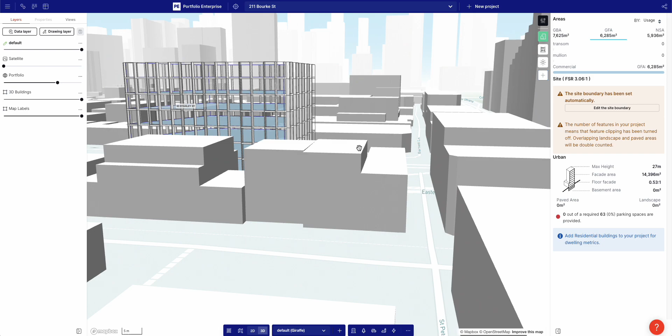Hey guys, in this video I am going to show you how to build this kind of articulated facade using a new block in our flow builder called Line Shorten.

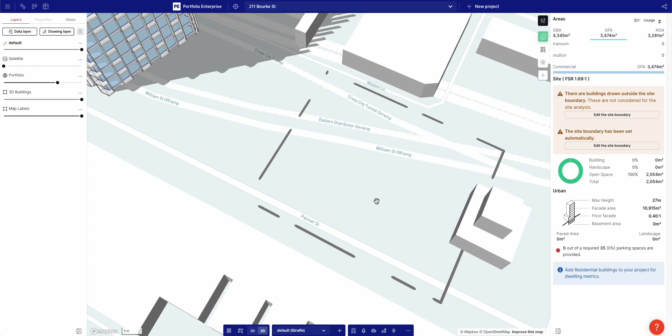Alright, and now before we start, I've created some types called a transom. And all this is, it's got a 3.8 meter height, 0% efficiencies, and I've created a mullion. And the mullion's the same, it's got 3.8 floor to floor and the 0% efficiencies. All right, so let's show you how it works.

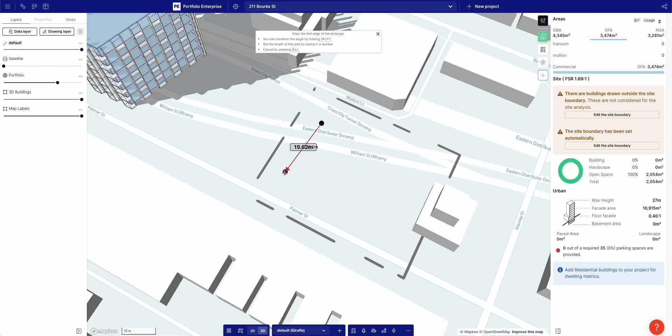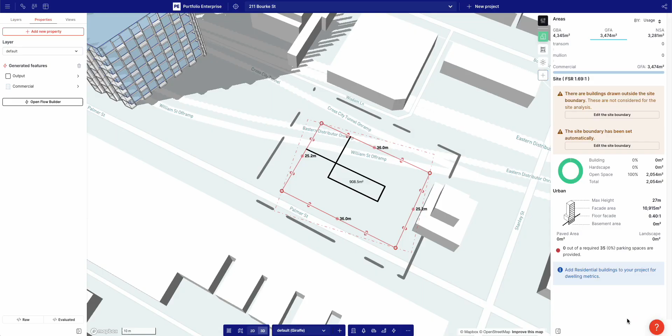The first thing we do is we open Flow Builder and we offset a line. And then we're going to add a usage here. So this I'll say commercial. And you can see here there's a number of levels now on this block, which is going to override any levels that are on the main feature. So I'm going to delete that and just save, just so you know what's going on. You can see now we've got this commercial, it's got 0 levels.

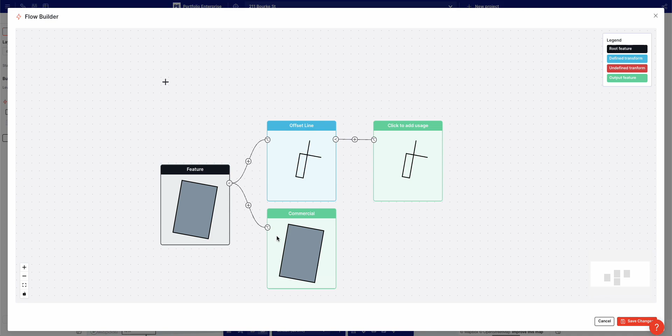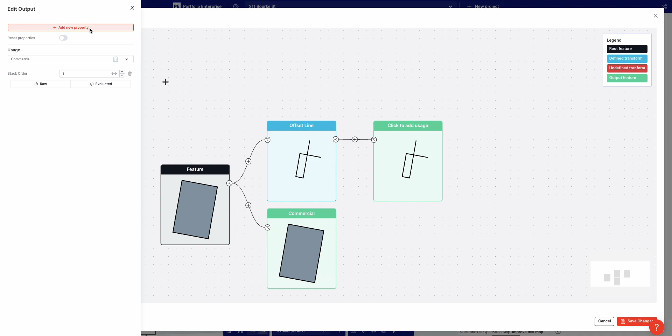And so if we add a levels property to the root feature, you can see it's suddenly gone up and we've got 1 level, so we can make that go up and down. Okay, so what's happening is the root feature now has a levels property, and because this commercial does not have a levels property, it inherits the root feature's property, and that's why I'm controlling the levels from the root feature. Or I can override them here, so if I add the levels property here, it'll override.

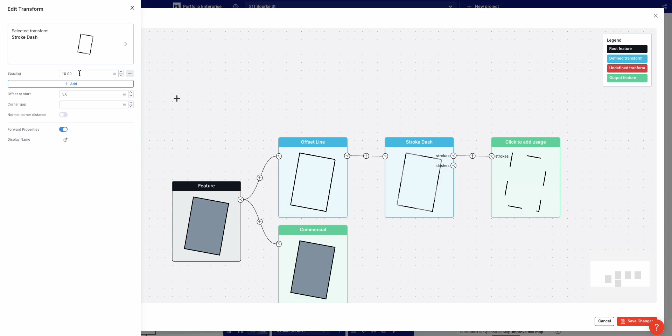Now what we want to do is we want to offset the line, say by 0.1, and we either go in or out. We go left, which is out, and then we use stroke dash to break that line into strokes and dashes. Okay, so far so good. Now, this is where we use the line shorten. So if I add this guy, I'm going to get the line shorten. Now what line shorten does is it takes a parameter at the start and a parameter at the end of the line. All right, 0.2, 0.2, and returns the middle bit of the line and the two ends.

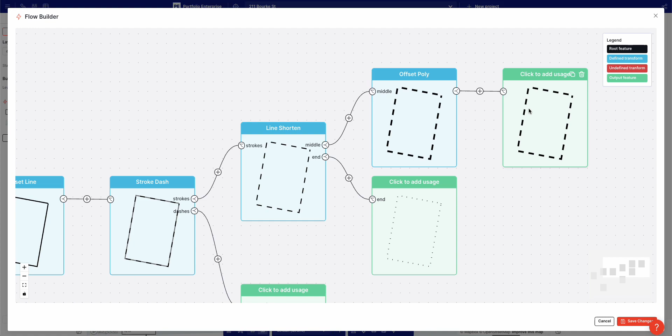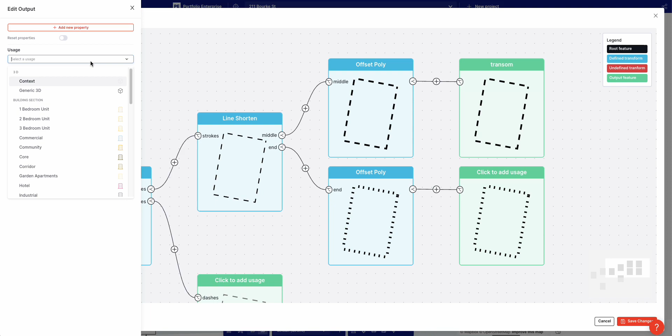And if I offset these polygons, these are the middle. So let's say these are 0.4, and we go to the left, and I'm going to add the transom use. And all the transom use is, remembering, it's just a building section type with 0% efficiencies and facade set to false. And then I do a similar thing here. Let's say these guys are 1 meter to the left, and we add the mullion use. And I hit save. You should see what's going on.

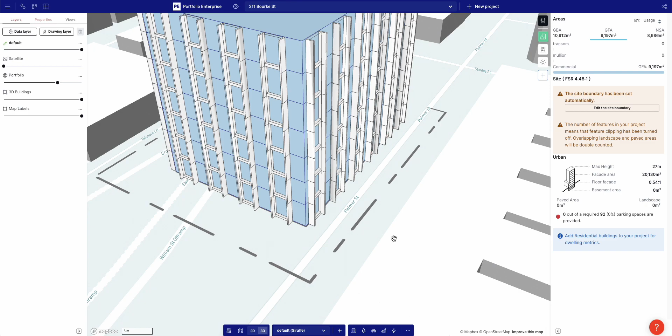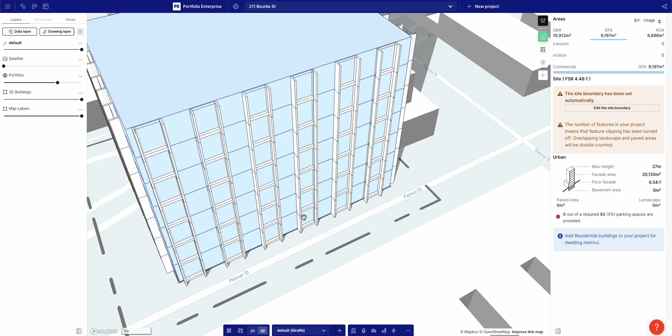We've gone stroke dash, and the strokes have been shortened by 0.2. We've offset those 0.2s out to make these mullions. We've offset the other bits out to make the transoms. The mullions have facades, the transoms have facades set to false, which means they don't show. So if I go back and I do the other way, you'll see they suddenly appear. I save changes, they disappear, and the transoms don't. Okay, that's cool. And now we just need to do the rest.

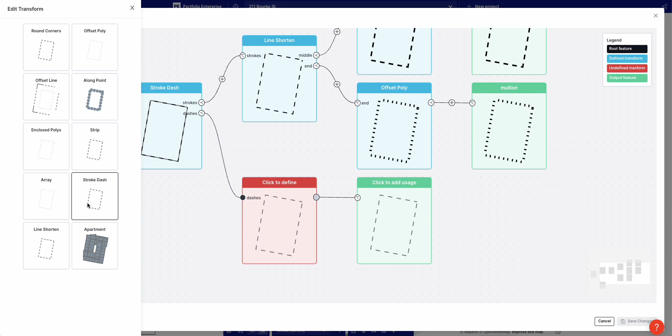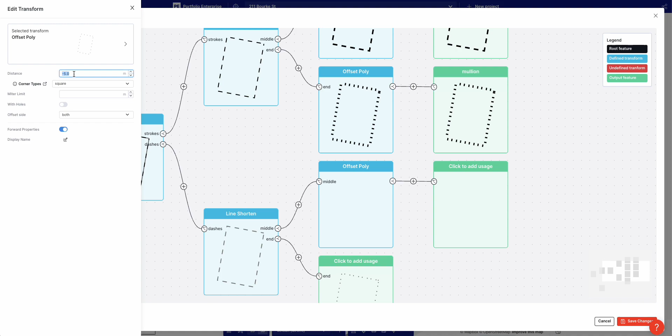So that is the dashes. And essentially we do the same thing. So we've taken the dashes and then we just do the line shorten. And we can do something different here. Maybe we offset these by 0.5 and 0.5. Okay, and now the middle, why don't we do this? We take the middle and we offset the middle by, let's say, 0.2 to the left, always to the left, and we're going to make it solid. So let's make it mullion, even though it's not really mullion, it's more solid panel.

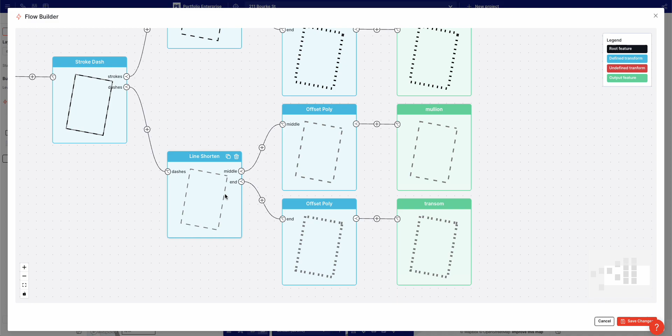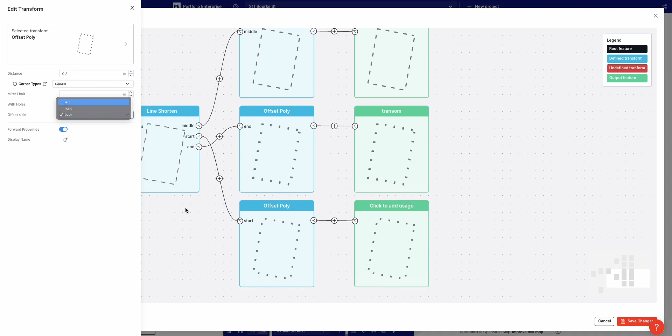Let's offset this polygon. We'll offset this 0.5, and then we'll add transom. Okay. Now we can actually do this thing where we get the start and the end. So why don't we do that? 0.5, so now we can offset this one. Let's offset it 0.3 to the left and add transom over here. Transom and save. And let's just see if we've got what we wanted.

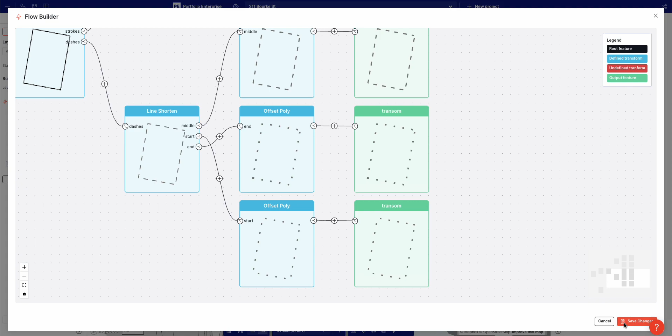Now we have not got what we wanted because something's offsetting in both directions, this little one. Okay, so I'm going to open that. See that both? We need that left. So that was offsetting to the left and the right, i.e. into the building and out of the building. And then of course it's trying to stack. We're still getting, oh no, we don't have the problems. Now we just have the problems. We haven't deleted the levels. Delete, delete, and delete. Save changes.

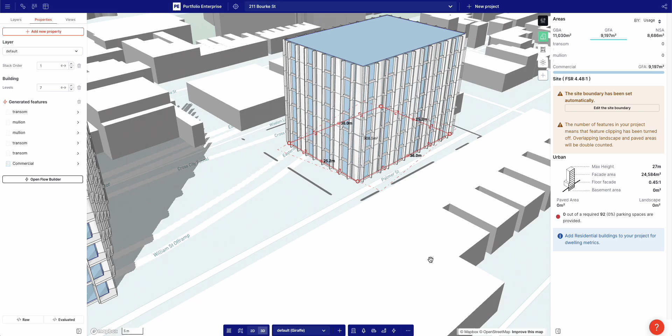All right, we've got a relatively complex little building here. So we've got a kind of syncopated grid thing that's going on. And I can sort of, 0.2, that's not the one I want. I want this one over here. You can see the strokes on the one side become mullions, and it's the other way on the other side.

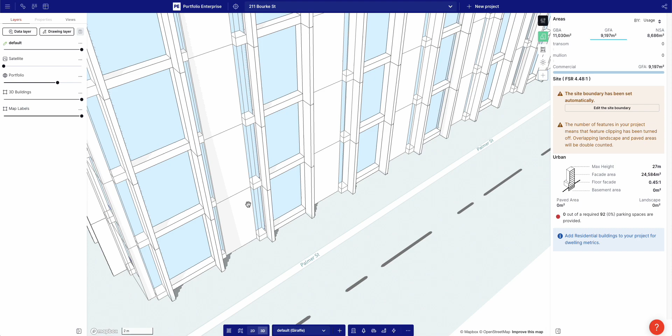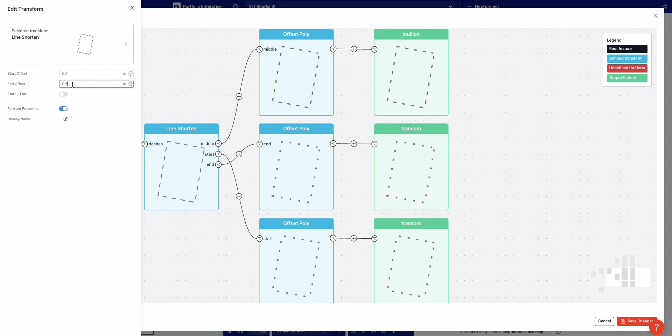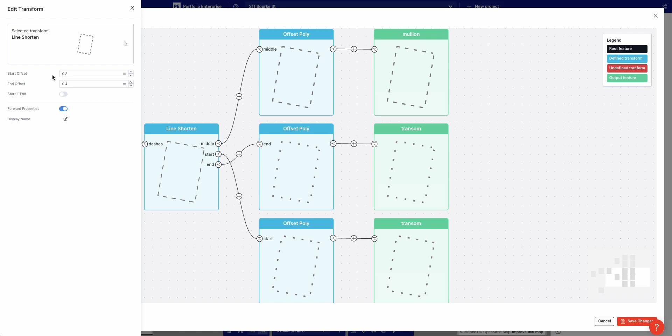You may take this line shorten and go asymmetric. So once you go 0.8 and 0.4, now there should be some asymmetry. Okay, you can see that asymmetry. There's the 0.4 and there's the 0.8. And I may just change that proportion ever so slightly up to 1. Cool. All right. Well, there we go. We've got ourselves a kind of little expressive facade just using stroke dash and line shorten.

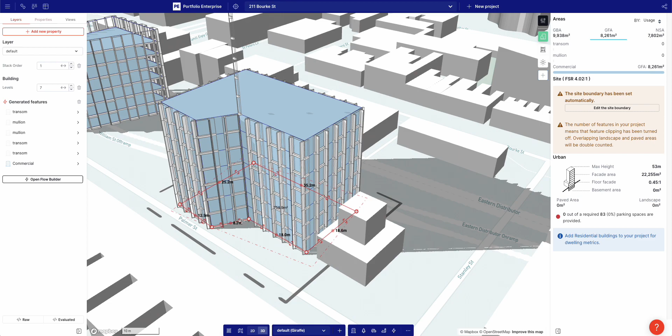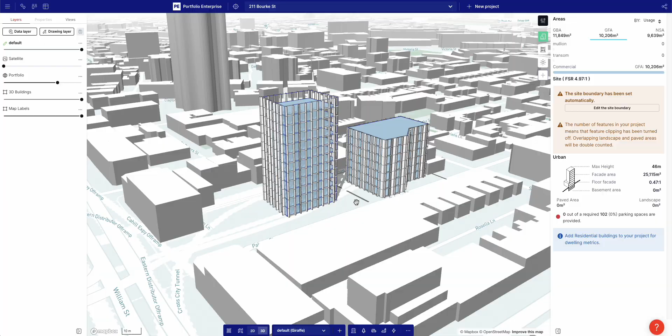And as usual, if you come with some oblique corners, you can get some stack order issues. But overall, pretty effective, I think. And I've now got two buildings with slightly different characters. Not majorly different characters. I guess this shows you the power of proportion, of using the same material palette and the same techniques, and I'm getting just slightly different feelings from these buildings.

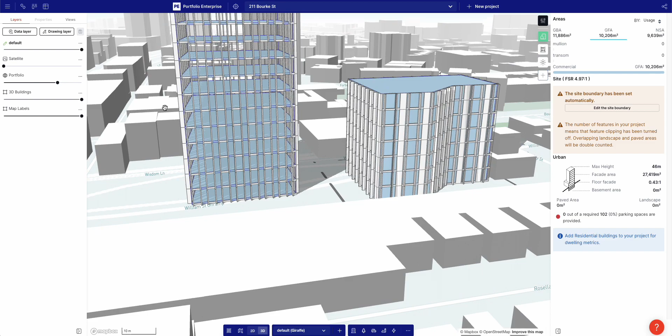And if I change this to like 1.8 or something, get a skinny one, you can make that even more pronounced. You can see what I've done here. I've just added on this commercial a no facades property, which I could do the same over here. Like that, to remove those facades, see what it looks like inside.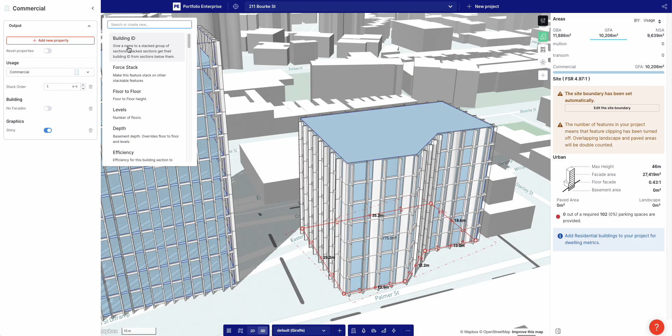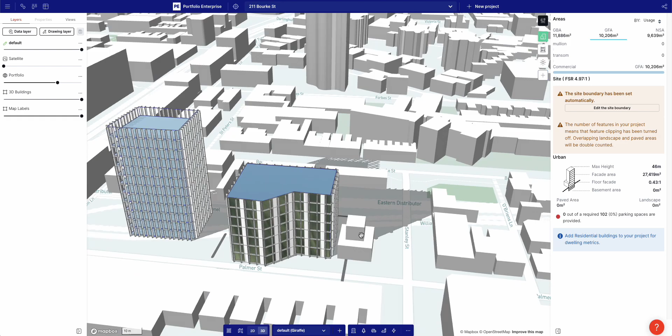But I'll show you this other cool thing. I'll add the shiny property, make it shiny. And it should be shiny now. There you go, shiny. That's cool. And if I turn that on, it's still shiny. There you go, that looks nice. All right, so we've got ourselves a cool little building.